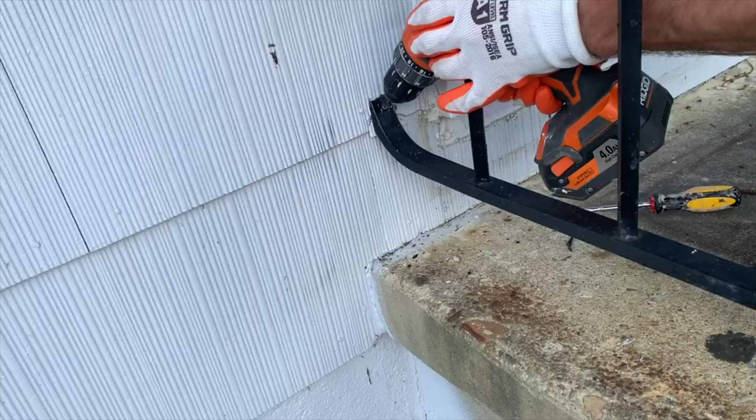The first step in this project is to remove the existing railings. I removed the screws that attach the railing to the house, and then I needed to cut out the railing where it was embedded into the concrete, which with the sawzall equipped with a metal blade wasn't too bad.

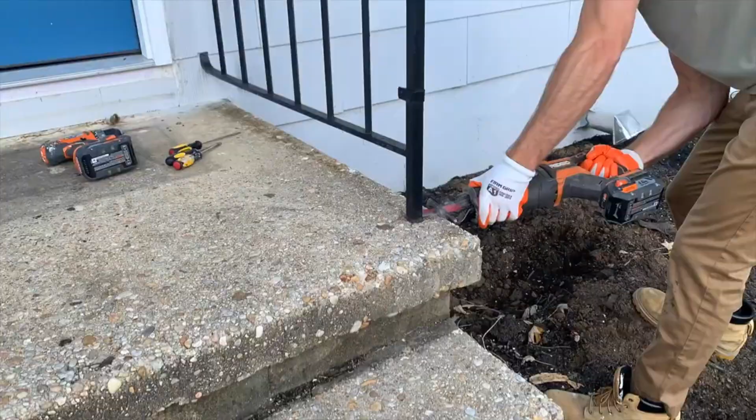Repeat this process on both sides and perform touch-up work as needed. Before actually installing the new railing, I resurfaced the concrete porch, which was my previous video that I'll link above if you want to check it out.

At this point, it's time to actually order your railing, and I'm going with the black cable system from Muzata. They reached out to me because they saw my back deck wire railing video, which I'll link there, which also used some of their products.

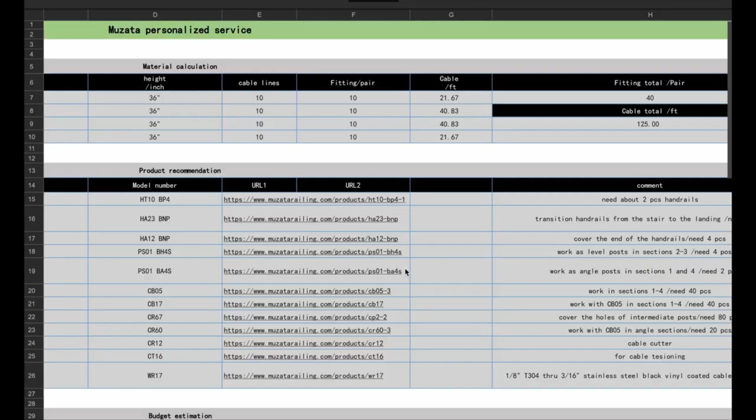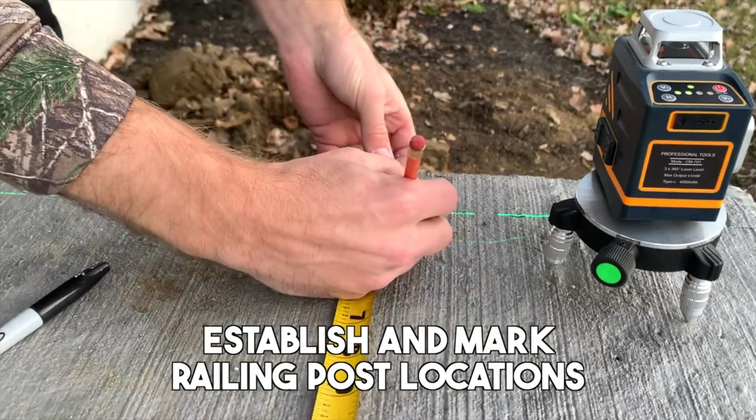First things first, we need to establish and mark the railing post locations, and you want to do this using either a chalk line or a laser level as shown. You want your post to be in a straight line. It's as simple as that.

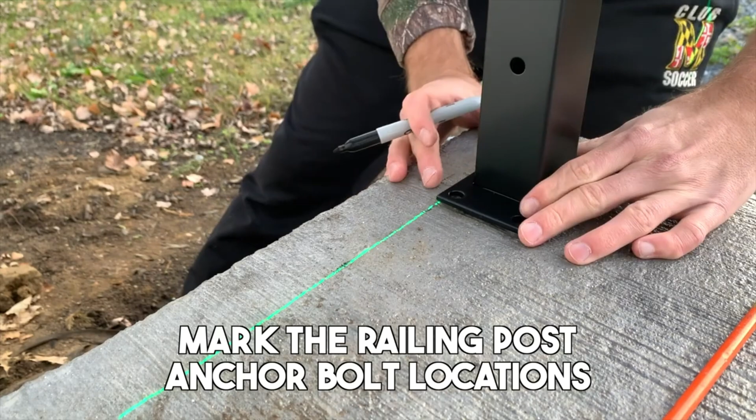Next, preliminarily place your railing posts on the concrete and mark the anchor bolt locations, which will typically be 4 per post, with a Sharpie so you can see the location on the concrete.

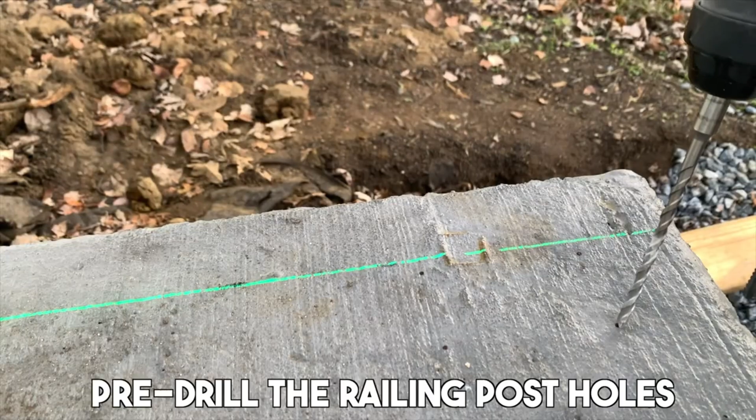After marking the anchor bolt locations, take a carbide tipped masonry bit and pre-drill the holes for the anchor bolts. Set the depth of the drill bit so it goes slightly deeper than the total length of your anchor bolt, and use a drill bit that is the same diameter as the anchor bolts that are going to be used to anchor the post to the concrete.

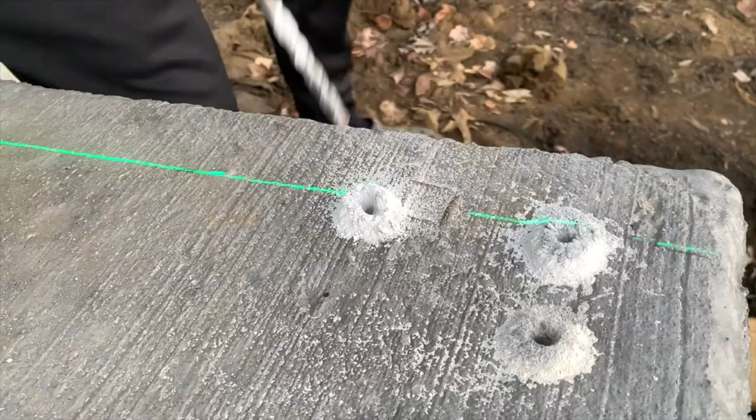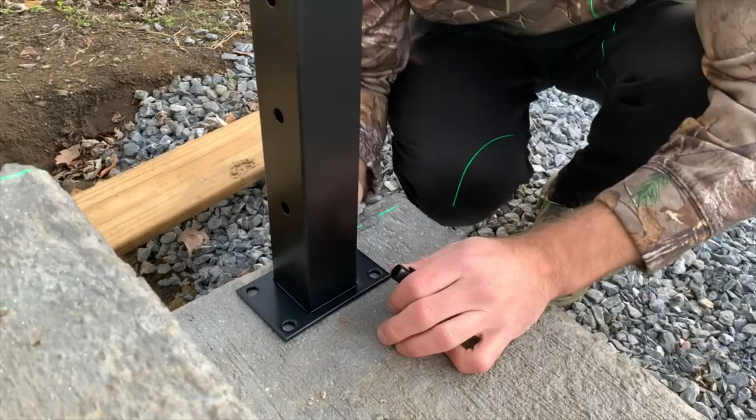Refer to the video description for more of a narrative on what size bits to use depending on the anchor bolts, and make sure you get rid of any dust either with a blower or a vacuum before proceeding. Repeat the post marking and pre-drilling process for all of the posts needed for your project.

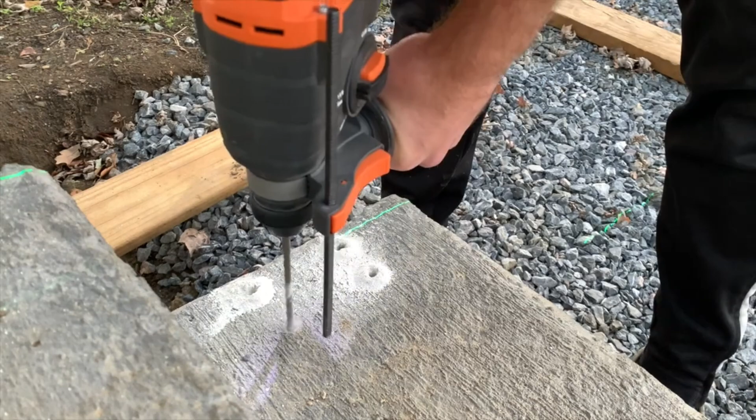Luckily for me, I only needed 6 posts, but God help you if you have a project that involves like 42. Good luck. And if you're enjoying these slow-mo shots of dust, hit that like button in a slow-mo fashion or regular speed.

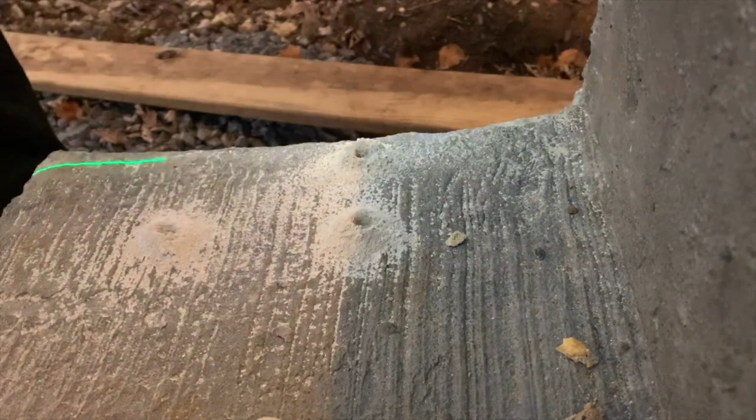Repeat this process for all of the posts in your project, and then we're going to install the anchor bolts to actually secure the posts.

An anchor bolt works by tightening down, and that increases the diameter at the bottom by causing the metal to flare out, fitting snugly around the surrounding concrete.

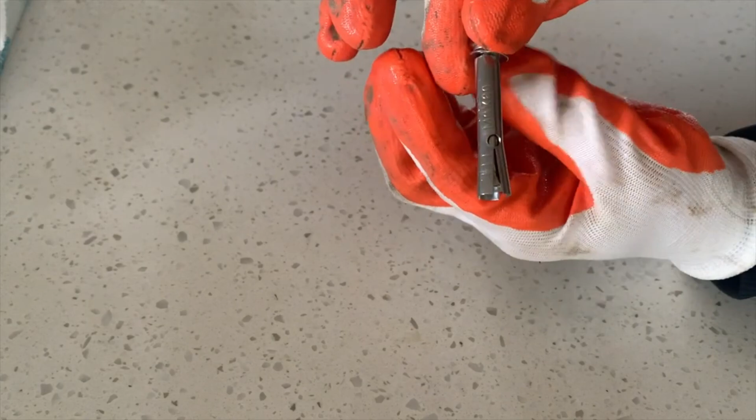Take your posts, put them over the holes that you pre-drilled, and then take your concrete expansion anchors and insert them through the bottom of the post and into the pre-drilled holes.

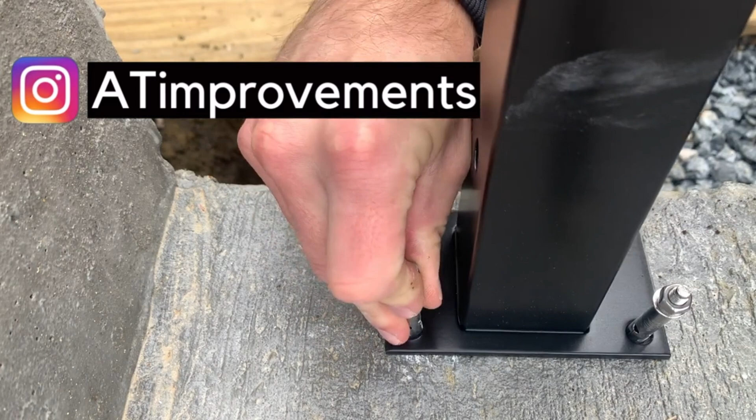You should need to use a hammer to actually get these to fit snugly within the hole, and once you get all of them tapped into place, use a socket wrench to just give the post an initial tighten. Don't fully tighten at this point.

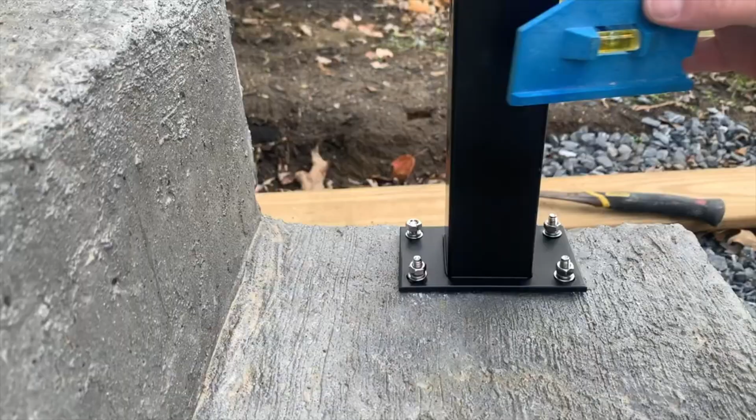Use a post level to make sure that your post is perfectly vertical and plumb, and if it's not, you might have to use some plastic shims underneath. Unfortunately, in my case, I had to use a few, but if you're dealing with a perfectly level slab, this hopefully won't be an issue.

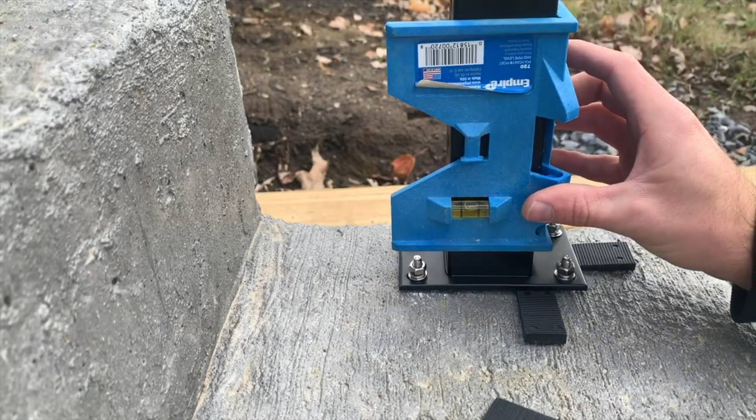We have the shims on both sides to give us a perfectly level post. You can see if we put it there, we're looking pretty level there, and also on this side. Once we have that, we'll go ahead and tighten these guys down.

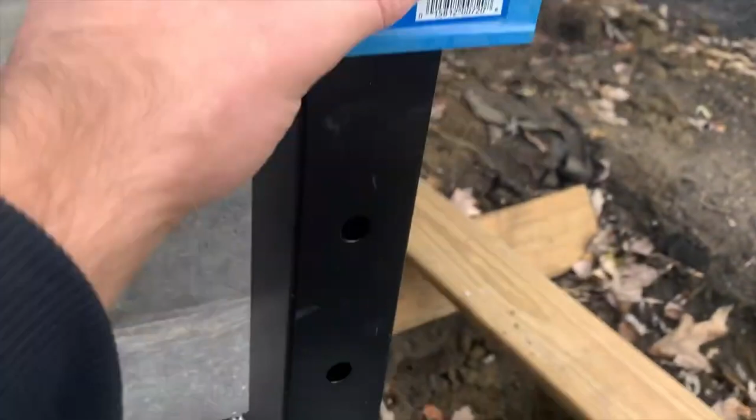After confirming that the post is level, you're going to now fully tighten your nuts, and you want to do this gradually. Don't tighten one all the way down and then go to the next, just kind of go uniformly.

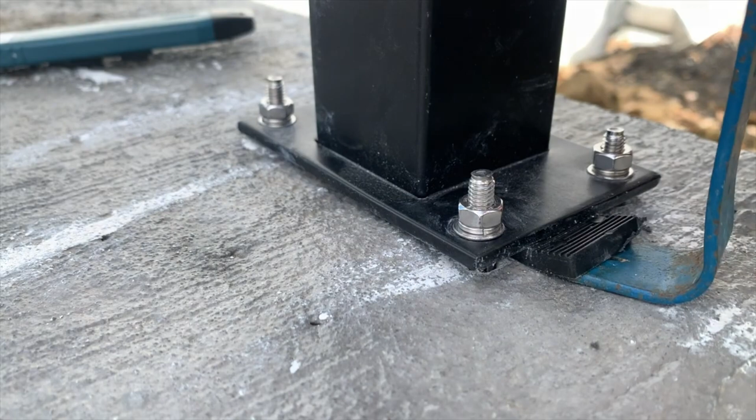Then trim off any of the excess shim using a utility knife to score along the post, and then snap off the excess. Repeat the railing post installation process for all of the rest of the posts needed for your project.

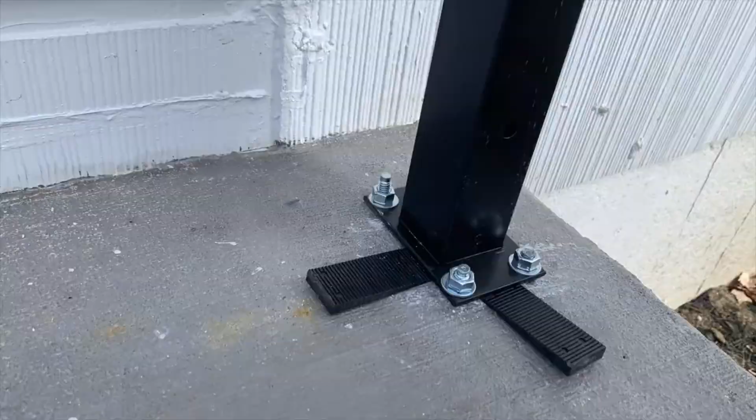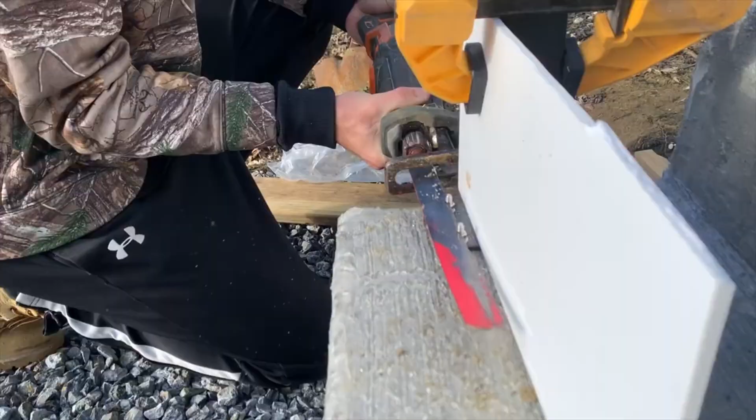Now, if any of your concrete expansion bolts are sticking up a little bit too high, you can use a reciprocating saw with a metal blade to trim all of those flush with the nut. I did this for all of the posts, and I used a piece of cardboard to protect the post, and that's why. Clean off any metal shards and then install the decorative post base cap like you're seeing.

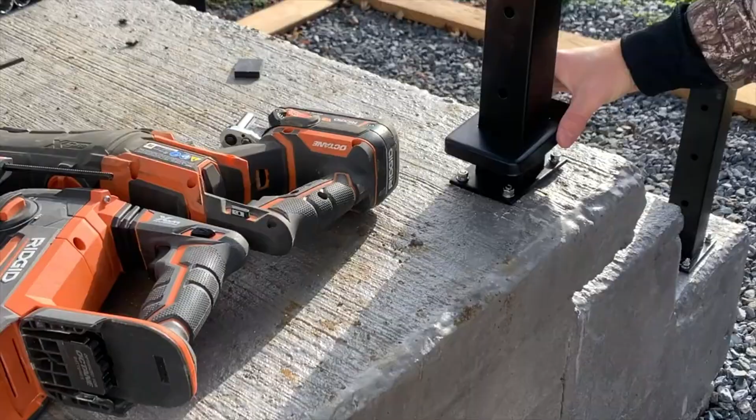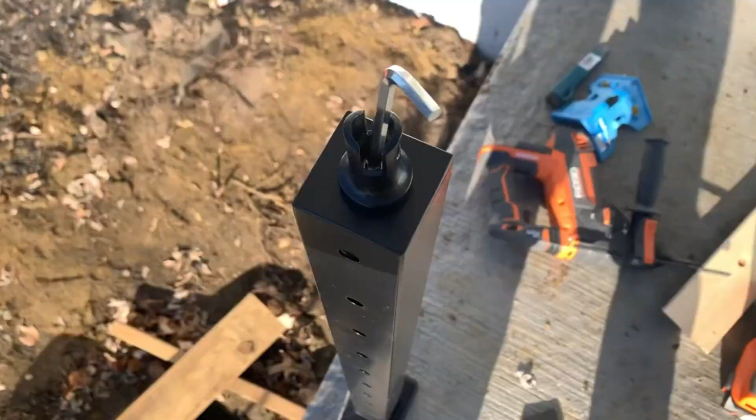Next up, we're going to install the railing, and to do this, I'm first going to install this bracket that goes at the top of each post. Refer to the video description for the exact name of all of this hardware, I'll have it linked down below. Preliminarily tighten everything up, and then if you have a flat railing, you're going to use the flat bracket, and if you have a curved circular railing, you're going to use the circular one. We have flat in this case, and we're going to go ahead and preliminarily get it installed there with the provided hardware.

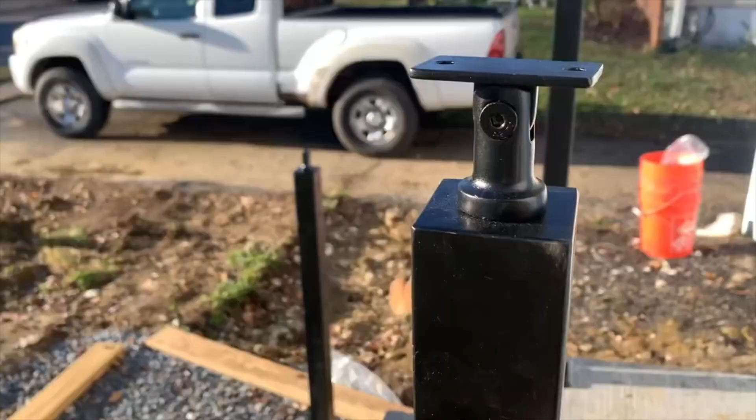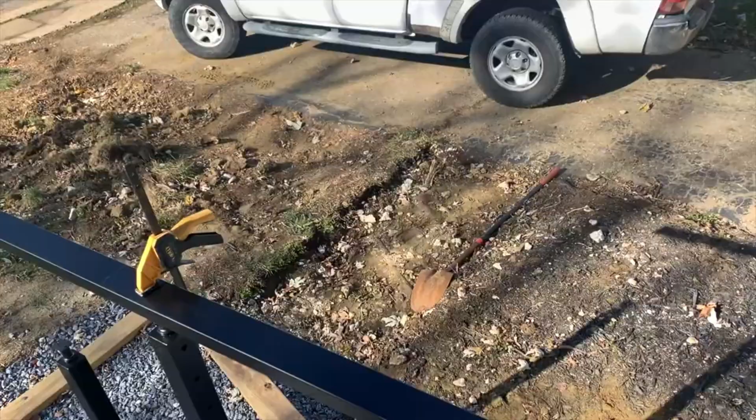Now it's finally time to install the railing, and to do this, I put it in place preliminarily, and I used some bar clamps to hold it in place while I got everything lined up and measured. So for my railing, I decided to make some rough cuts first. I marked at around 48 inches for the longer segment, and I'm going to go down to my miter saw equipped with a metal blade and cut that just so I have 2 more manageable segments.

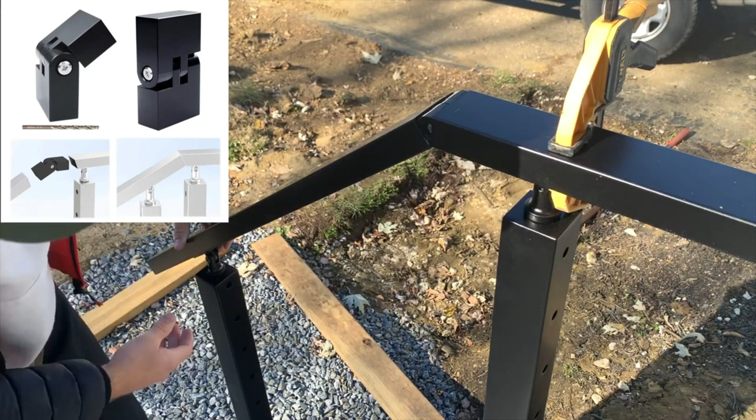Then I'm going to take the adapter clip that came with the railing to find my angle for the stairs right there. So as you can see, I have it clipped in place. It's meeting up, obviously not at the perfect angle. I'm checking the bottom bracket to make sure that it's perfectly flush. And then I'm going to use my angle finder to find the angle between the flat section at the top and the angled section at the bottom.

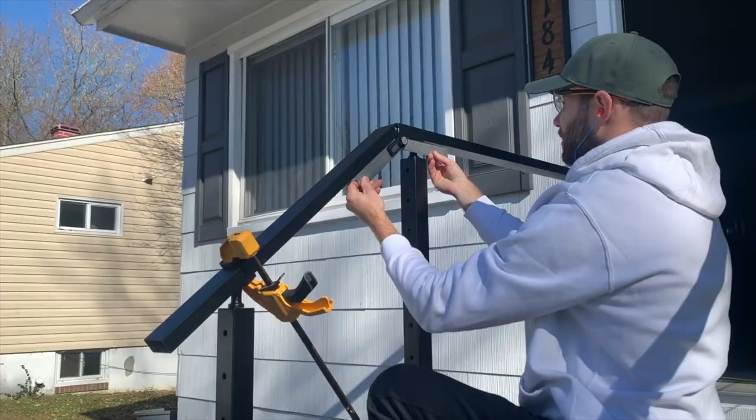So I purchased this angle finder off of Amazon, I'll link it in the description. And using it, I found that the angle between the railing was around 141 degrees.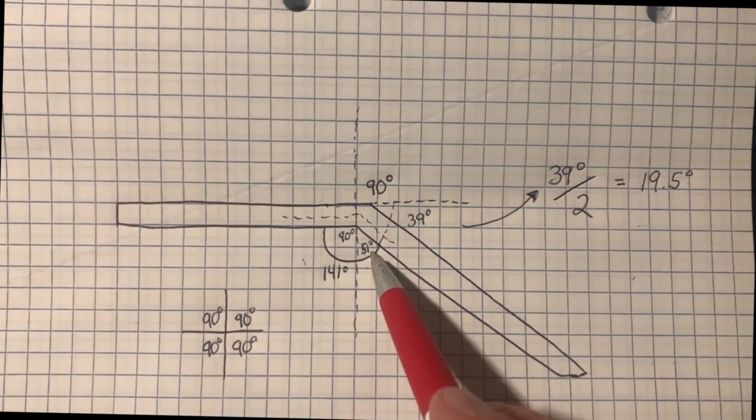And if you remembered anything from geometry, we know that right angles add up to 90 degrees. If we have 141 degrees, that means we have 51 degrees left over on that one right angle, which means we have 39 degrees to make up the remaining 90. But we have a miter cut, so we're going to take that 39 degrees and divide it by 2 to get the angle for each of our miters.

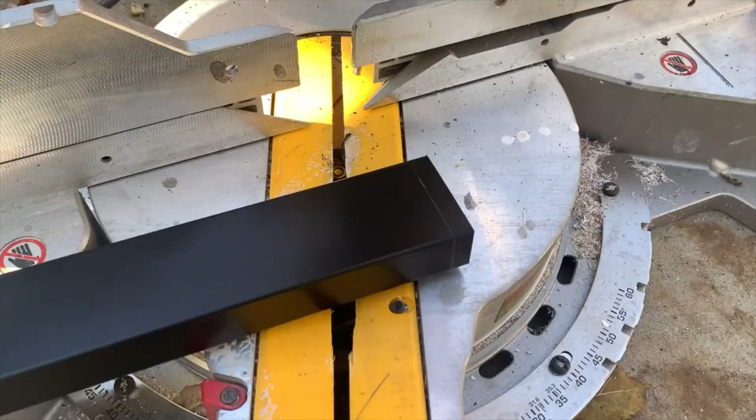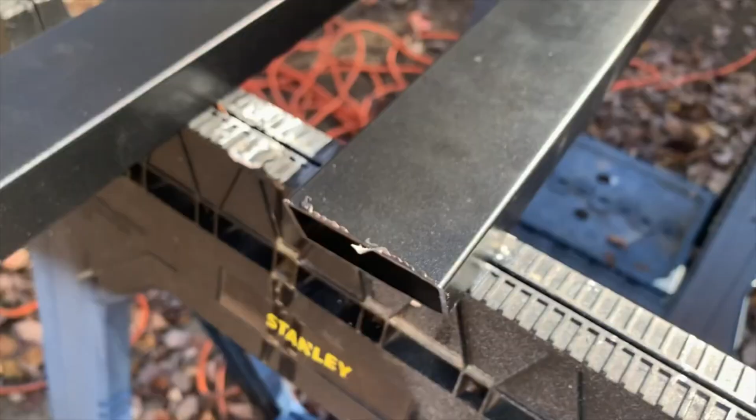So set your saw to the appropriate angle, and remember, you want to cut it vertically for this type of railing, and then make sure that your saw is equipped with a metal blade. I'm cutting that one segment right there, which is a longer segment, and then the smaller segment, both at the same angle. Depending on the quality of the saw blade you use, you might find some jagged edges on the railing. If so, clean that up with a file before proceeding. The last thing you want is a jagged edge on a railing.

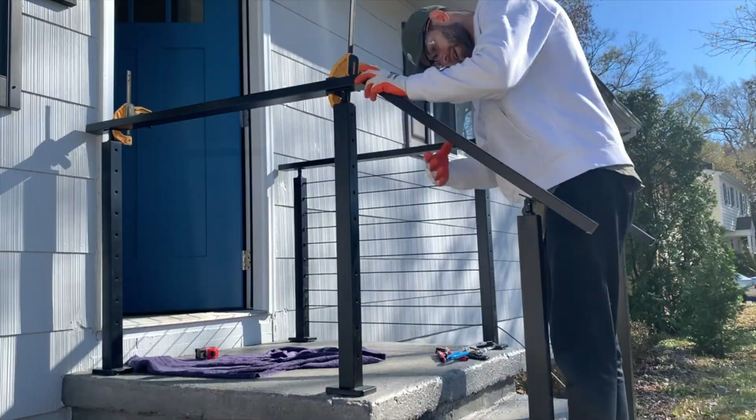Not a good look. So after cleaning up the miters, I temporarily fastened the railing to the post using some bar clamps, and then I used that adapter to attach the two segments of railing together. Here's the moment of truth. How does the miter look? Not bad, I can live with that. Looks pretty good on that side, and then I did the other side as well. Both of them turned out pretty dang good.

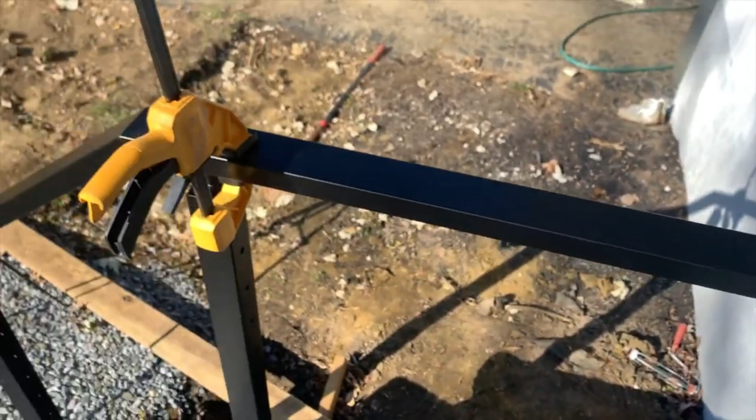So here's how the railings look preliminarily placed on the posts. Now we're going to go underneath and mark the actual bolt locations so that we can take it down and pre-drill the bolt holes. This drill bit came with the Muzata railing set, and you're going to pre-drill the holes for each bracket that's going to attach your railing to the post below. You also want to pre-drill the holes so that you can bolt the adapter together on both sides of the angle.

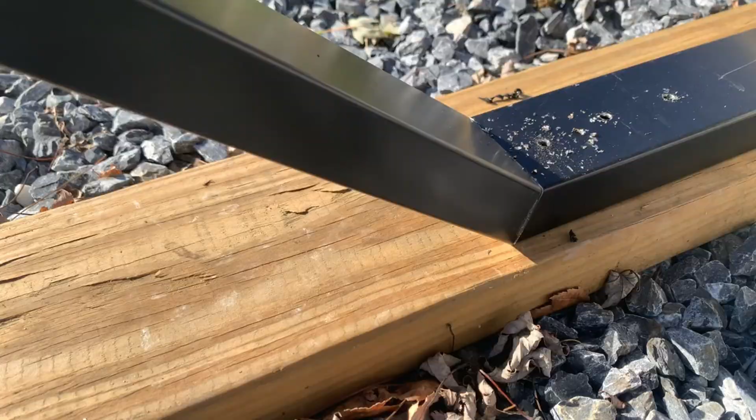Follow the manufacturer's instructions, then use the provided hardware to fasten the railing to the post below. Repeat this for all of the posts and then tighten everything up permanently.

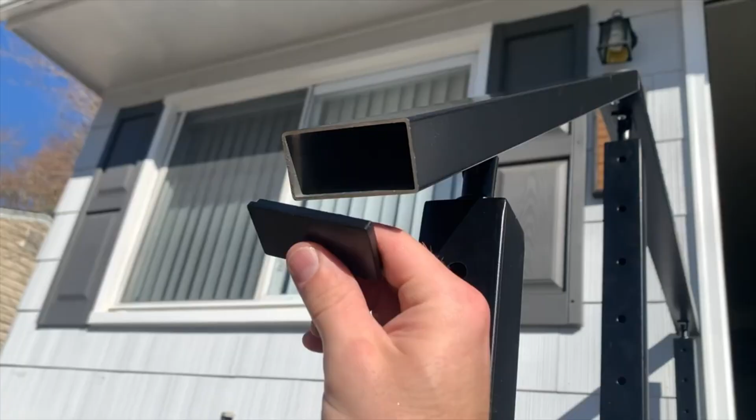To install the railing end caps, I recommend using some construction adhesive because they didn't really stay on their own. So now that we have the railing post installed as well as the railing, we can finally install the cable.

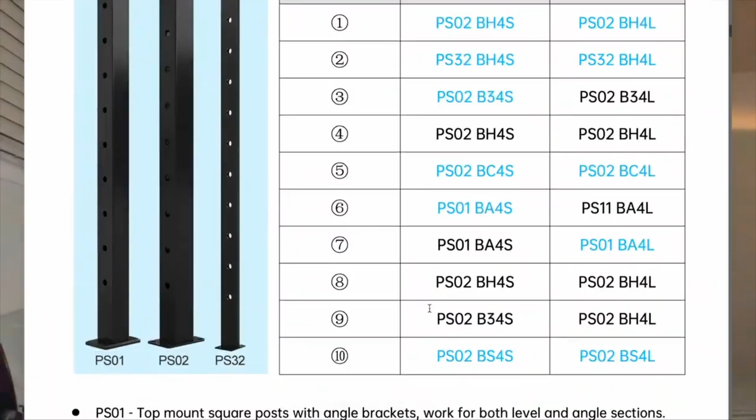If anything I say here isn't clear, Muzata has a ton of literature on their website as well as many detailed installation videos, so follow along as best you can, but refer to their additional resources if needed. I pre-cut all of my cable, measuring the distance between the posts and adding about 1 inch just to give myself a little cushion.

This vinyl wrapped cable doesn't fit within the hardware, so you're going to have to trim off the last bit of jacketing with a utility knife. It takes a little bit of time, but it's not too bad.

After trimming off the jacketing, you'll be able to fit the cable within the hardware, and then you're going to want to install the 3 threaded fasteners, which will hold that cable in place within the hardware permanently. Be sure to tighten everything up snugly so it doesn't come out later down the line. Repeat this process for all of the cable you'll need for your project.

This is where cable railings get annoying because there is a lot of hardware, but I think the look is well worth it. Next, take the adhesive backing and put it on each of the washer sleeves, and you'll see why in a minute.

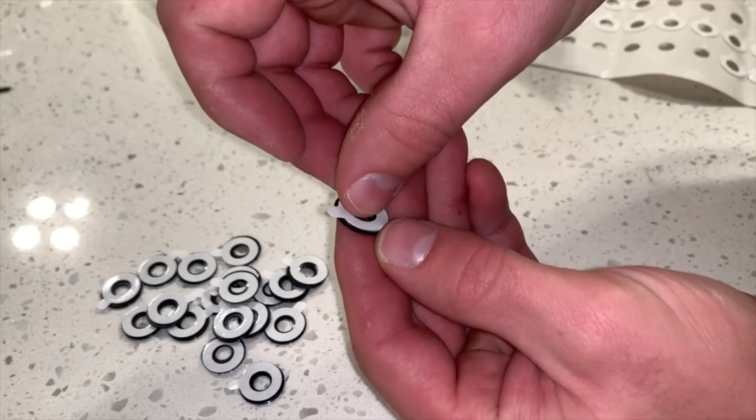Essentially, we're going to thread 2 of these sleeves onto each of the cables, and these are going to attach to the post later on. You'll see what I mean in just a second.

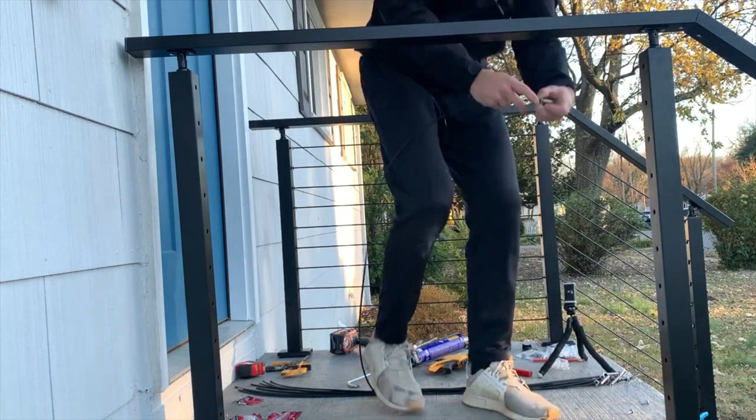At this point, we're going to push our inner terminal into the post there and give it a test to make sure that it's not going anywhere.

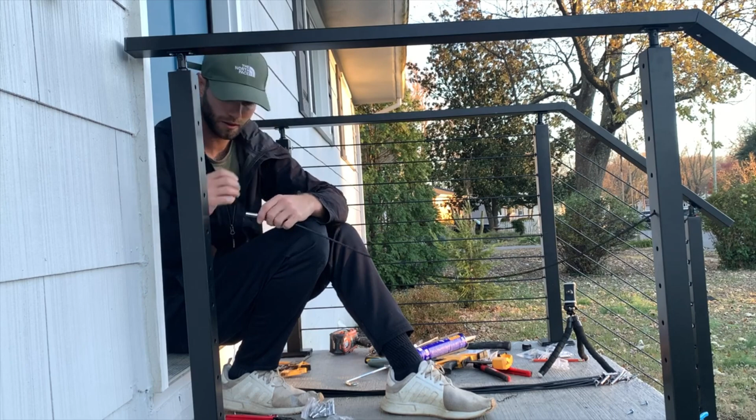Then cut the other side to length and trim off the jacketing as needed. You're going to have to do a little bit of trial and error to figure out what length you'll need so that you can tighten everything to your desired tension.

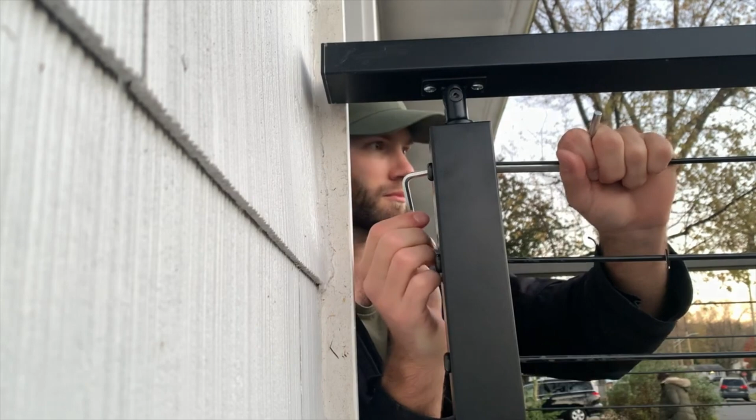On the opposite side of the inner terminal piece of hardware, you're going to have something called a tensioner, and this has a threaded bolt that goes through the opposite end of the post, which you tighten up using the socket wrench. This is a redundant process, so repeat it for all the cable in your project.

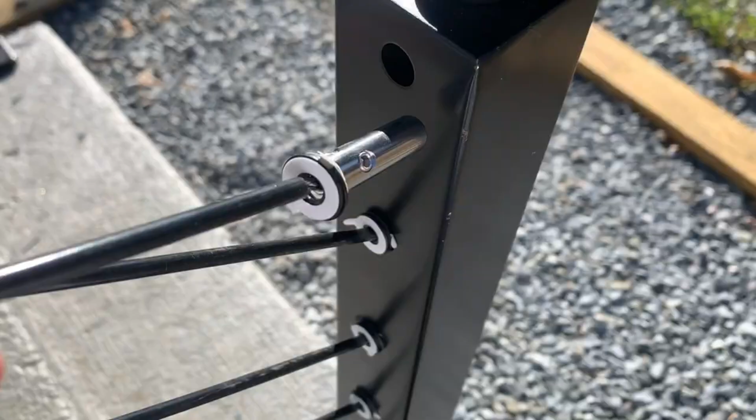After finishing up the flat section, we're going to move on to the stairs. You're going to insert the inner terminal at the top of the stairway, make sure that it's secure, then trim off the vinyl coating and install the tensioner on the bottom. There you can see where we'll have our threaded connection.

For the angle of the stairs, there's something called an angle washer, which tries to match the angle of the stairs and give you a more clean look. Thread the bolt into the tensioner and tighten everything up.

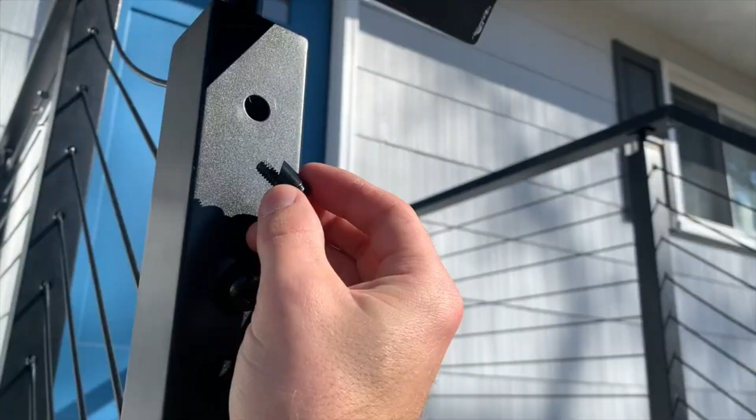Again, use the socket wrench, which catches on the tensioner so you can tighten up the cable without it twisting. Here I am showing how the socket wrench mates with the tensioner, and then tighten everything up to your desired tension.

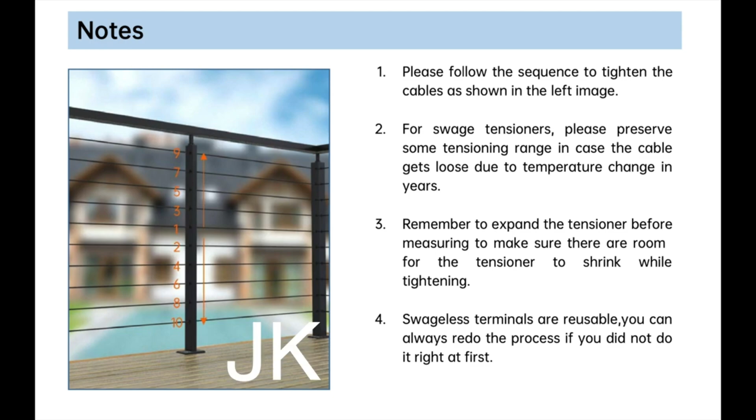At this point, all you need to do is repeat this process for all of the cable involved in your project. It's pretty redundant and will take you a few hours, but it's really not too bad.

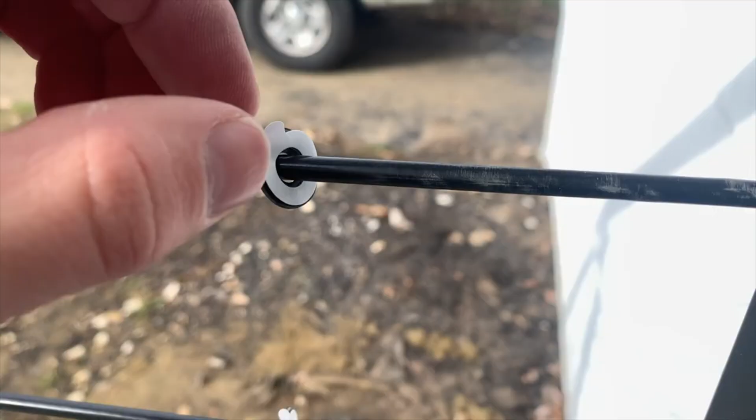Lastly, if you remember those adhesive sleeves, now you're going to peel off the paper and stick it to the post, which will cover up where the wire actually intersects with the post. It's more of an aesthetic thing than anything else. With that said, let's take a look at the final result.